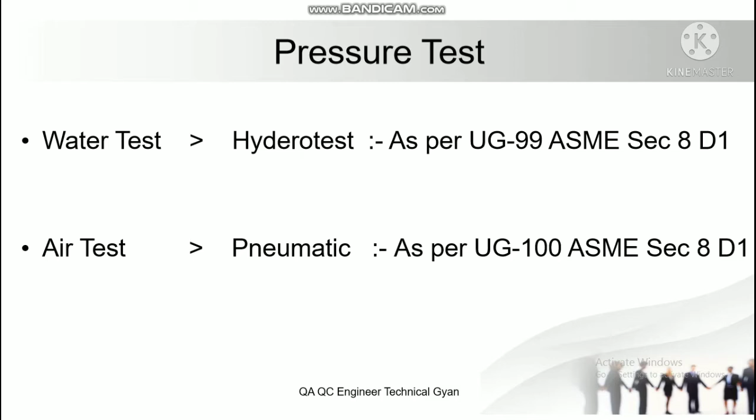In pressure testing, mainly two types are involved. First is water test and second is air test. If we use water, then we call it hydro test, and if we use air, then we call it pneumatic test. For hydro test, we go with UG-99 as per ASME Section VIII Division 1, and for pneumatic test we go with UG-100 as per ASME Section VIII Division 1.

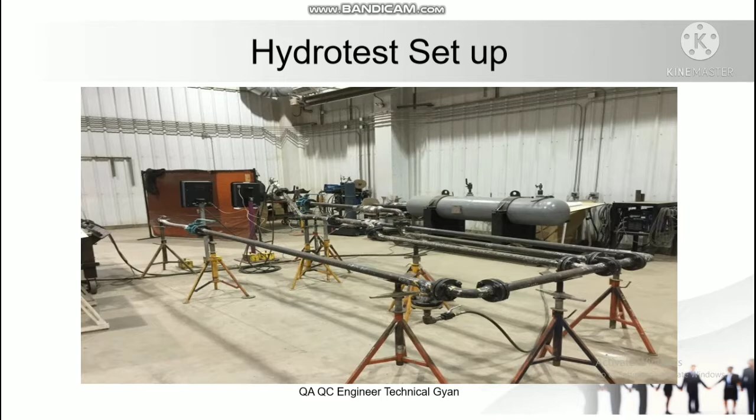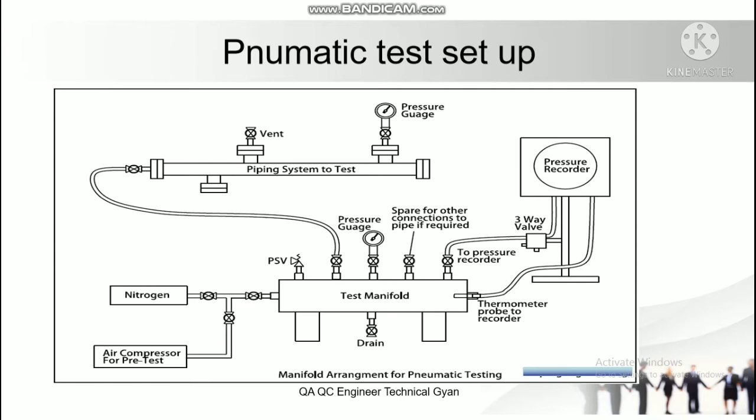This diagram shows the typical setup of hydro test. We can discuss it in further slides. This is a typical setup of pneumatic test. In this we have two pressure gauges, test manifolds, and the piping test system. In this video our main focus is on hydro test.

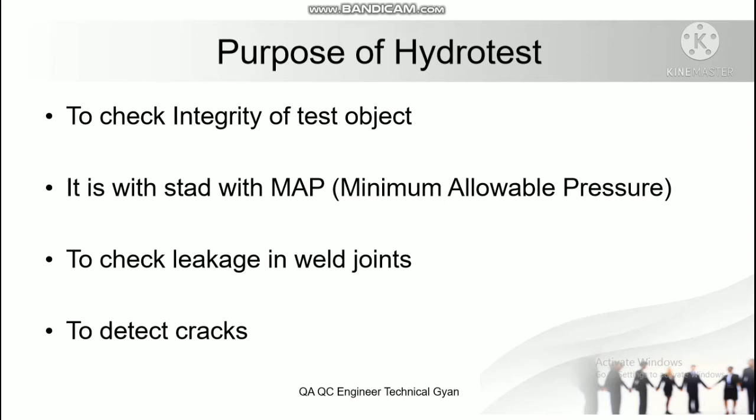The purpose of hydro test is to check integrity of the test object. Integrity means we weld two different pieces, pipes or plates, in a closed isolated system. We can check whether the joint withstands the minimal allowable pressures or not. To check leakage of the welding, to check leakage in weld joints, and to detect cracks.

What are the requirements? Pressure gauges, minimum 2 nos. Pressure relief valves, test manifold, pump of adequate capacity, water certificate, which shows the pH level, blinds for isolating the ends. Inlet and outlet position should be defined, vent shall be at the top position, and drain should be at the lowest position.

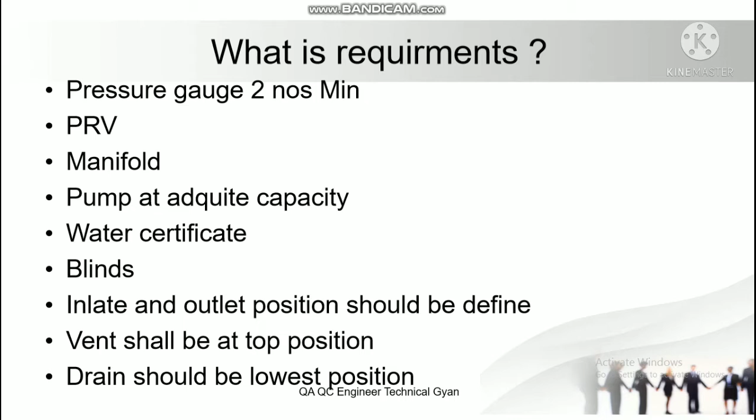In pressure testing, the main parameter which should be considered at the time of testing is the pressure. Pressure is the most important parameter to be checked properly. The test pressure is always 1.5 times the design pressure. Design pressure we can take from drawings and clients. The set pressure of the pressure relief valve is 1.05 times the test pressure.

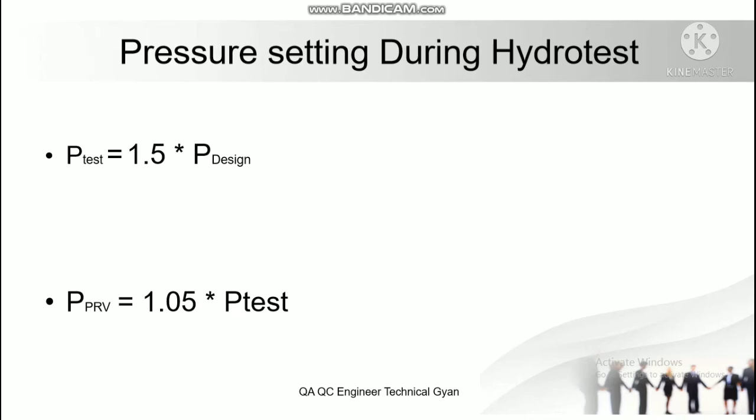Sequence to perform hydro test: blind the equipment and keep one flange open to fill the water. Means isolate the system so it does not have any leakages, and keep one side open to fill water. Pressure gauge and pressure relief valve shall be installed. Bolts shall be tightened as per torquing requirement. We have different torquing requirements for different bolting, so as per requirement we provide torque and tighten the bolts.

Hydro pump of adequate capacity shall be attached. Water shall be filled to the maximum level. Open the vent valve. Start raising the pressure with the pump. Keep it running and observe the gauge pressure as required. We can build pressure with the help of a pump and by hand pump also.

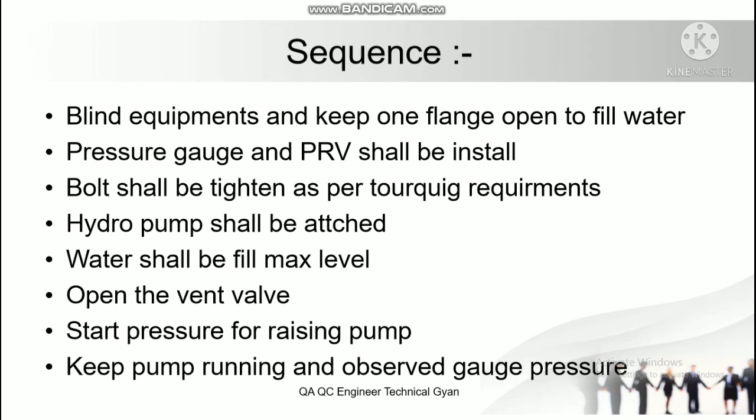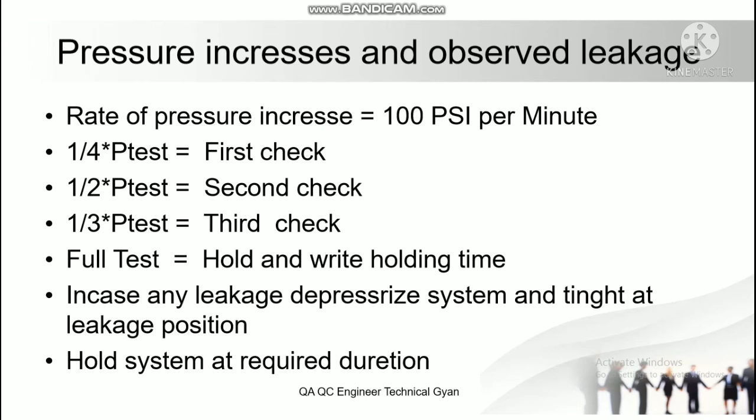In case we find any leakage, we need to depressurize the system, mark the leakage and correct it. Before and after the pressure test: before the pressure test we check the outer circumference and note its reading. The NDT summary shall be verified. Dimensional verification should be done. Safety procedure shall be checked and complied with, and the test area shall be isolated.

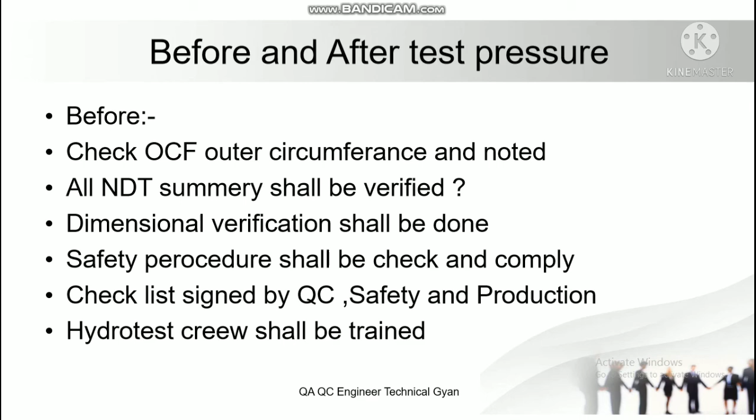Checklist should be signed by QC, safety and production members. Hydro test crew shall be trained. The persons performing the hydro test should be trained and know all needed things. After the hydro test we check outer circumference deformation. Once released by QC after checking leakage,

open the vent valve slowly and depressurize the system. Now open the drain valve and drain the water from the vessel. If the vent is not open, the vessel will be deformed and rejected. The pressure vessel deforms and does not match our required dimensions. For this reason we shall open the vent valve compulsorily at the time of depressurizing the system.

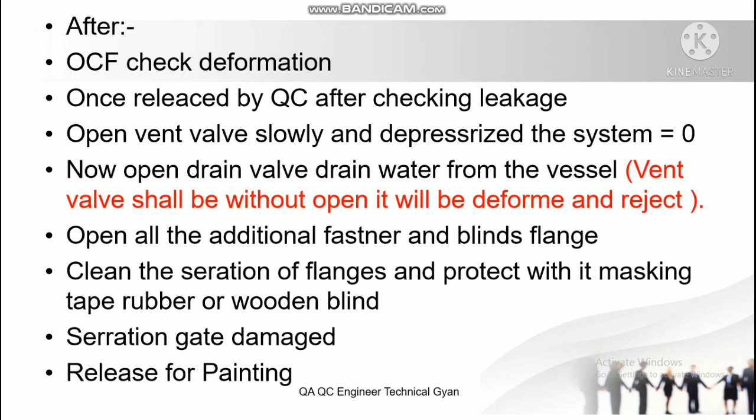Open the additional fasteners and blind flanges. Clean the serration of the flanges and protect them with masking tape, rubber, or wooden blinds, so the serration does not get damaged. Release for painting. In this way we can learn how to perform hydro test.